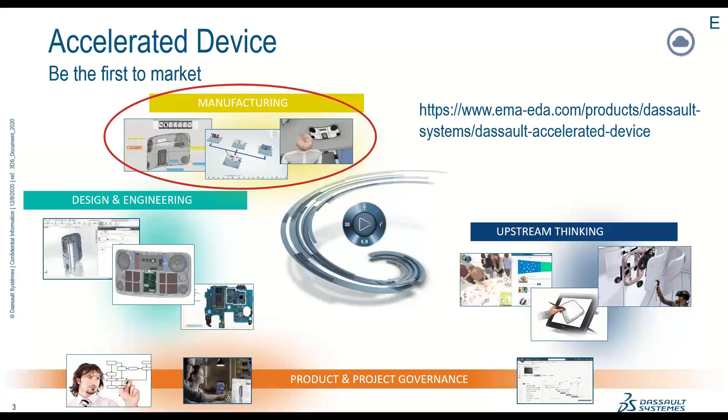Thanks, Ed. Thanks, everybody. So this is interesting, working with EMA on this, because for years EMA has really been one of the primary companies that I've gone to for years for ECAD solutions. And now we're going to talk about taking those solutions that we do for ECAD and going way beyond design and engineering. We're really going to move it into the manufacturing side of the business. So I'm very excited to be working with EMA on this.

So what we're talking about is manufacturing process engineering challenges. And when you think about it today, and they really substantiated themselves during COVID-19, is really demand planning, supply volatility. And then the other thing we're seeing is mass customizations in manufacturing. People want to have their solution of the size and shape and color that they want. And basically, it's a global world of production and distribution.

So it's no longer being done at a single site. You might have multiple sites. And what we're trying to address here is really some of the questions we have on the right side is, how do we handle the increasing number of product models and variants? How do you handle increasing product complexity? Validating, is the product manufacturable?

And we'll talk a little bit about using a virtual twin to actually set up and look to see how you put your product together, at the engineering perspective, and then how to ensure products start production despite an aggressive timing. That's the number one thing. Everybody wants their product to go to market as fast as you can, and it's really sometimes really hard. And how do you handle change management effectively once it's hit manufacturing, and how to achieve the manufacturing process and manufactured product right the first time?

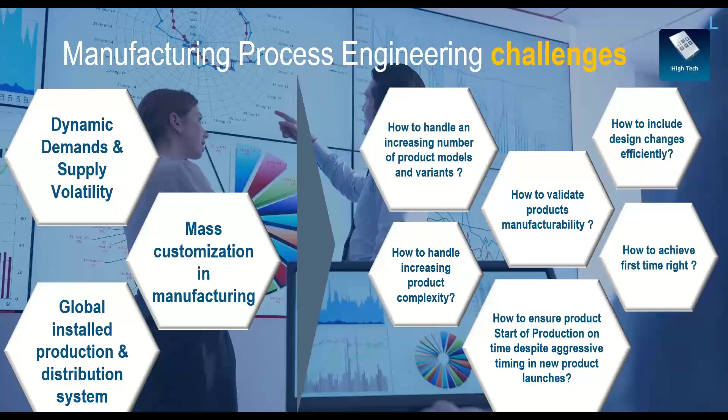Great synopsis of all the process engineering challenges, Lou. And what happens there is we have this great digital divide, this great chasm, and on one side you've got the engineering tools, and companies don't care about engineering tools whatsoever, other than an end to a means. What companies care about is products and getting products to market.

Designing those products, as I have and as Lou has for many years, we're design engineers. That's what we do. We use the authoring tools on the engineering side. We create schematics, and we validate that product that's going to work in the environment that's going to go in.

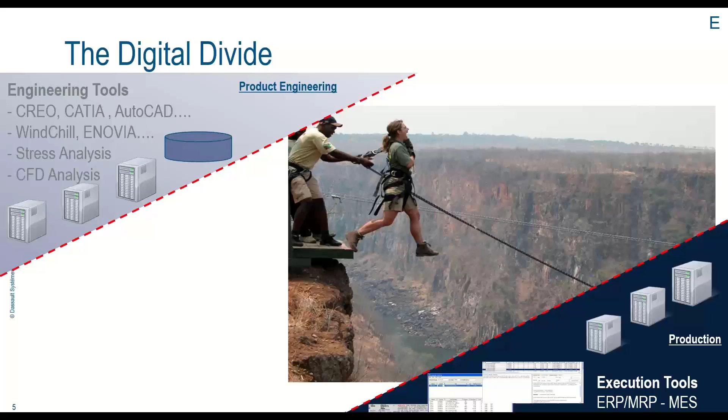But then when it comes to manufacturing, we basically throw it off the cliff, just like that person is taking the step into the chasm, or we're basically throwing it over the wall and saying, okay, production, manufacturing, you figure it out from there, and let us know if something doesn't work - we validated our stuff on this side. So the big thing that we're really looking at now is being able to plan, being able to visualize and validate that gap that's in between.

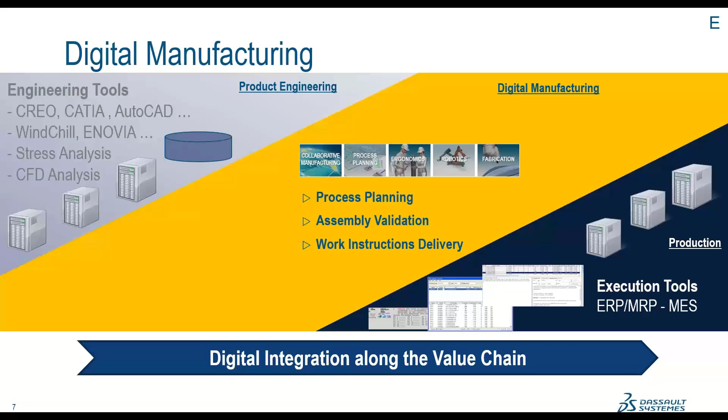In our case, we've had this digital manufacturing, this product engineering, and product production separated by this chasm that we talked about. Now we have this digital manufacturer, this way to do process planning, creating the digital twin, as Lou mentioned earlier, and being able to validate those assemblies and that process. Being able to create work instructions and really shorten the time it takes for people to learn to assemble the process, and make sure that process is well defined when it comes to the factory. So this is one of the things we talked about, crossing that chasm.

We're very familiar with the design process, and then we throw that design over into manufacturing. They create a definition. Well, what if you had the capability of visualizing that, doing a what-if of what if I move this workstation for this product a little bit closer to the next step in the process? What if I had better process planning? Everybody can have a plan, but plans always become obsolete very quickly.

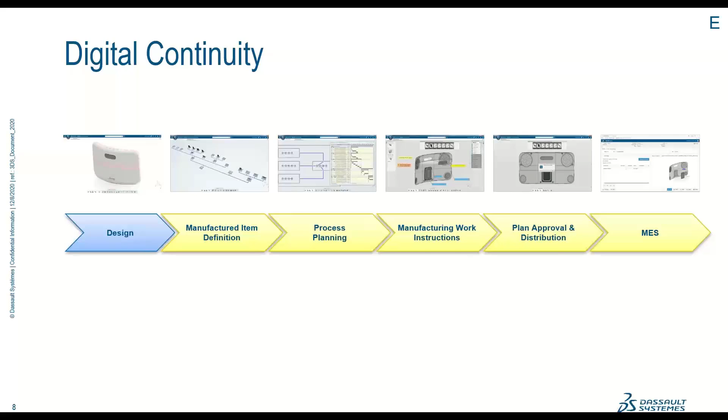So the process of planning and validating that process, and visualizing it in a way that can be optimized, is key. We mentioned work instructions before, getting people to condense the time it takes them to figure out how to effectively process and move things through the assembly line. And then when it comes to distribution, planning the approvals for agency approvals and distribution, there really needs to be a feedback loop there, and with our process and this digital continuity, there really is.

And we've got a short video to show how some of the mechanical or manufacturing bill of materials can be derived from the engineering bill of materials. Lou's going to go over that for us.

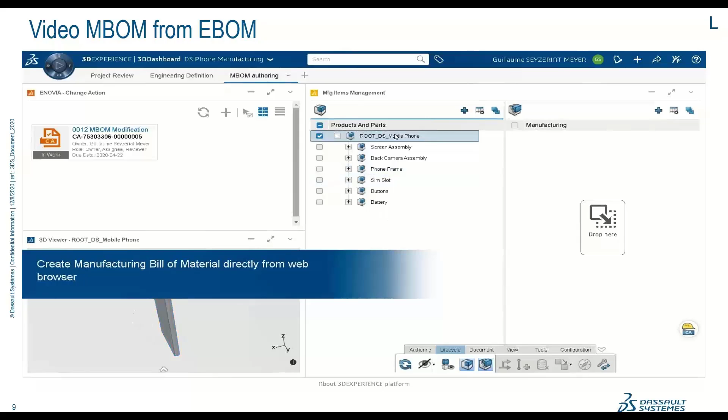Today this can be from mechanical or electrical, because we can connect to the ECAD and MCAD solutions. What's interesting is all the people who've been making manufacturing BOMs with their highlighters, crossing out bills of materials—sorry, we've taken away your job and made it digital. So what we can do today is take the bill of materials from the engineering side, and very simply drag and drop the different components into the manufacturing side to create a bill of materials. What's really unique is that we can also include make-or-buy decisions.

We can also include other types of structures to modify this. What you're seeing in the lower left, marked with a tag, is that as you take a different component, it actually shows it coming from the 3D world, from your MCAD, showing all the parts coming off. So the real crux of what's happening here is we've taken away the laborious work required to create a manufacturing bill of materials, and it's all validated. It allows you to take make-or-buy parts, parts you're receiving, and add other components like glue or fasteners, and combine both electronics and mechanical so you can really do an electronics box build.

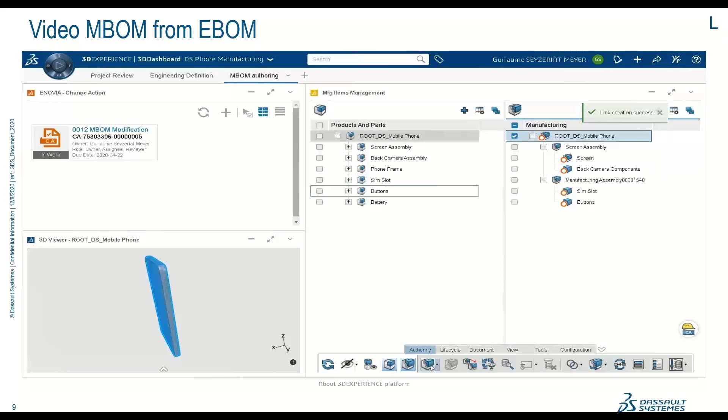So we can move on to the next slide, but the whole point of showing this is to modernize the divergence from the engineering BOM to the manufacturing bill of materials.

That's a great process to really understand and be able to visualize, Lou, and that's kind of what we're talking about here: this manufacturing process engineering. It's a way to visualize and get a great overview to model, plan, and optimize, using that digital twin to create those, do that process planning, create the work instructions, and optimize the assembly process.

It's really key. We talk about new product introduction, NPI, and NPI is either on time or, oftentimes, it's late. What do you do to condense the time during this process to make sure your product hits the market when it's supposed to? We visualize, validate, and optimize the product, whether it's assembly or manufacturing, and in a lot of cases the design process itself needs to be optimized as well, with things done concurrently instead of in serial mode.

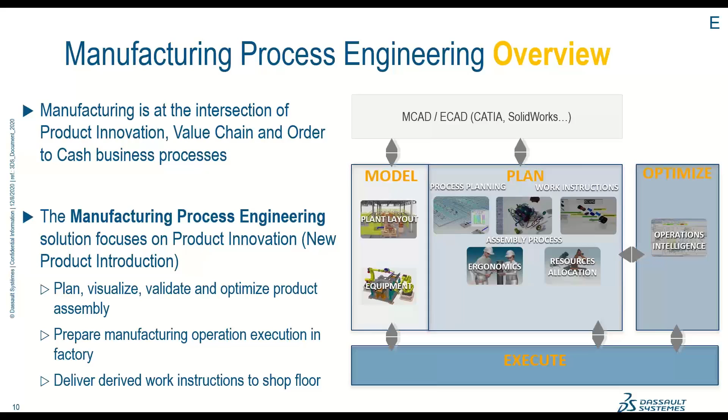And then we'll execute on those plans and move forward and make things better as we go every day. I know Lou and the Dassault folks have done this process with thousands of customers around the world, and the digital continuity is one thing that they're really experts at, right, Lou?

Oh, absolutely. What we've done is we've taken our rich history in automotive and aerospace and moved it now into the high-tech and digital manufacturing world. We have the ability, using the platform, to literally look at the engineering items. It's more about moving MBSE, model-based systems engineering, into manufacturing. So we're really looking at manufactured item definition, and you saw me doing that with the bill of materials. Then you do process engineering, where you figure out how the pieces go.

But once you have the pieces figured out, you want to validate your process steps. Are the process steps going to work? Does the factory you're working with have the right tools to do this? Once we have that, we can optimize it and tell you how to do the best line balancing, so we can optimize the manufacturing process.

And then, because we have the rich content coming from the engineering design, we can really simplify making process documentation. The days of taking Polaroids or pictures or snapshots of your engineering screens are gone, because we can do really interesting process documentation and change the way we do that.

And then we can look at the process distribution. This is really for some of the bigger companies that have electronics on one side and traditional box build on the other. We can look at multiple factories at the same time. We can integrate to the ERP system, and we specialize in manufacturing operations management and S&OP. That's really where we start getting into factory management.

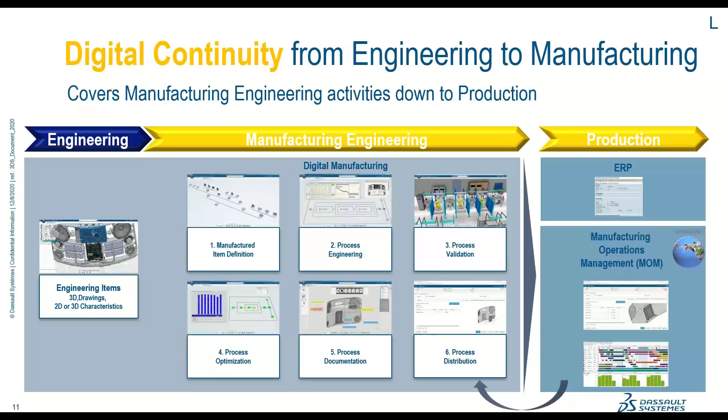That's a great point, Lou, and that goes all the way back to the engineering guys that thought they had got it right from the get-go. Oh, absolutely. You mentioned, what is the impact? How does it impact the business? How does it impact production, hitting the market at the right time? Improving the efficiency of the manufacturing planning.

And I always say planning, because there's a difference between having a plan and doing the planning, because the plan is always going to change, or something's going to happen. So being very efficient and having the proper manufacturing planning is absolutely key. We'll go into it a little more about shortening the learning curve for the production workers, but we want to have that continual feedback loop between process engineering, manufacturing, and even design engineering. So those are some of the impacts.

I think we have a short video here talking about the digital continuity and how that works in the process.

So when you're looking at the processes here, we're going to show you a bunch of different processes, and this is all using the Dassault platform. We're really recognizing and looking at the way products are built, and what you're seeing here is a product structure being delivered in a manufacturing perspective.

Each one of those is a work cell per se, and we're delivering the components in the 3D realm by representing them as multiple components that get put together. So that's how we create the bill of materials.

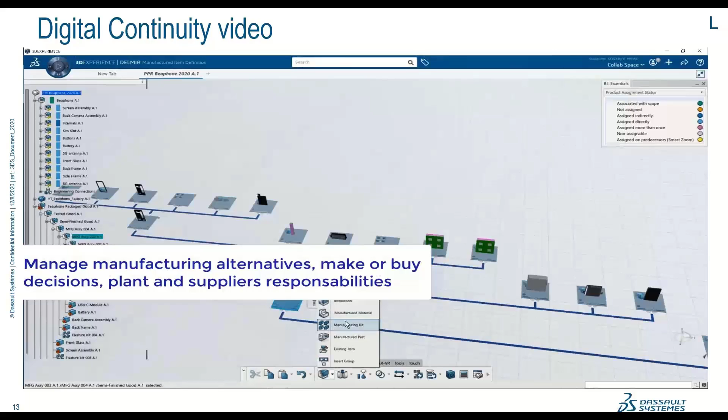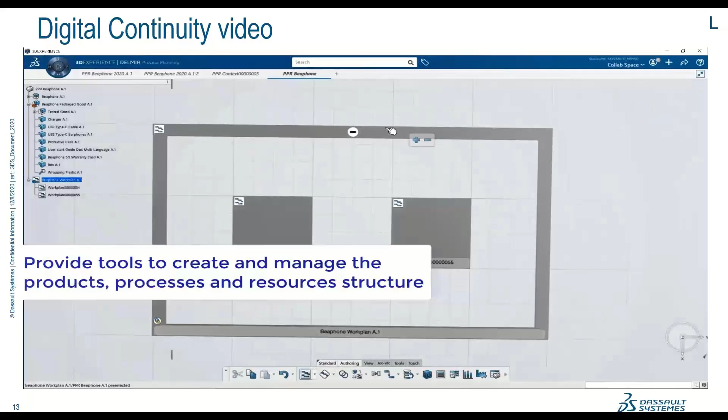What we do is we optimize the product for tooling and such, so we can actually do a lot of different interesting things. Basically what we're doing here is we're building the resource structure of what the factory would look like. The first one you looked at was what the breakdown of the parts were.

Here we're looking at the definition of it, and what we're doing is we're trying to optimize how the components go together with the resources you have within the factory, and to understand if you need to do some changes in engineering.

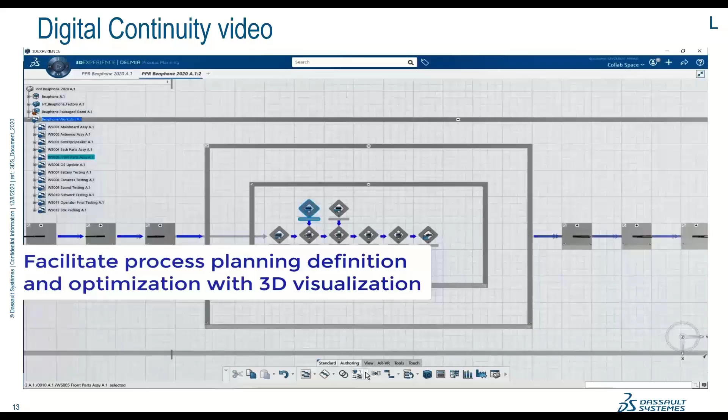The thing that's interesting about this is that you can do this anytime early in the engineering aspects of the product, so which is really, really unique.

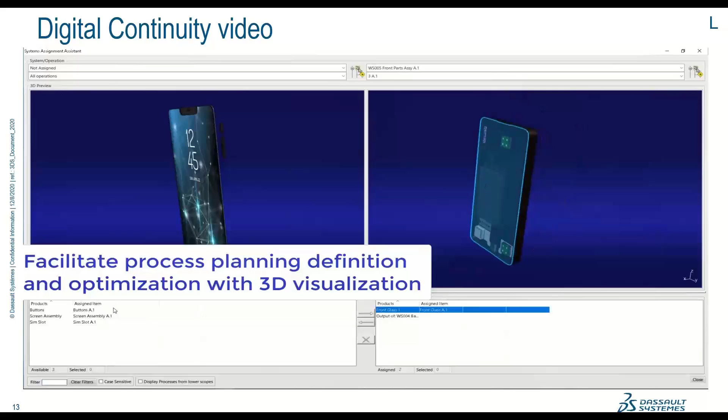So you can see that we can really facilitate process planning, and basically because we're using rich data, we can take the digital twin, we can literally show you all of the components broken down, and then we can take it to a different level altogether, where we can assign machines and factories and robots.

So if you have an NPI line or a production line, we can really super optimize everything, and we can really assess the resources you have.

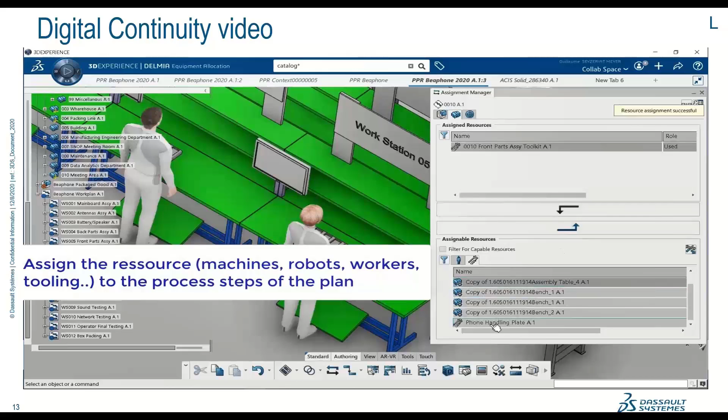How many workstations, how many tests you have, and we kind of create the digital twin of all that, and we understand how your product is going to run through, and then basically we can look at the resource planning, and then we can line balance and optimize the way you're placing.

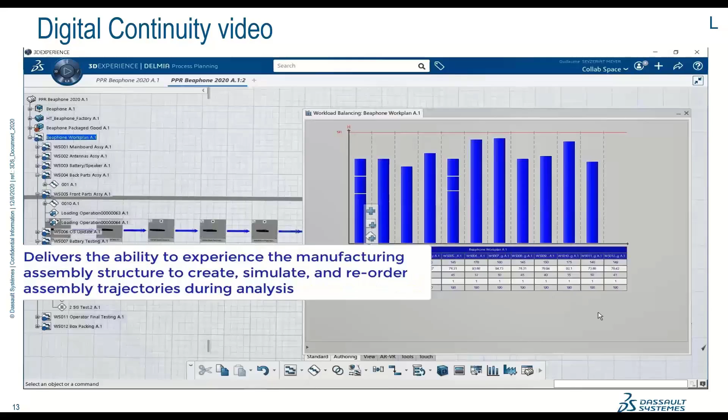Now here we're creating some work instructions, again, because we have the rich data coming from engineering. We can literally show the operator how to put the part in. You see that the part goes in, and then it has to be moved forward.

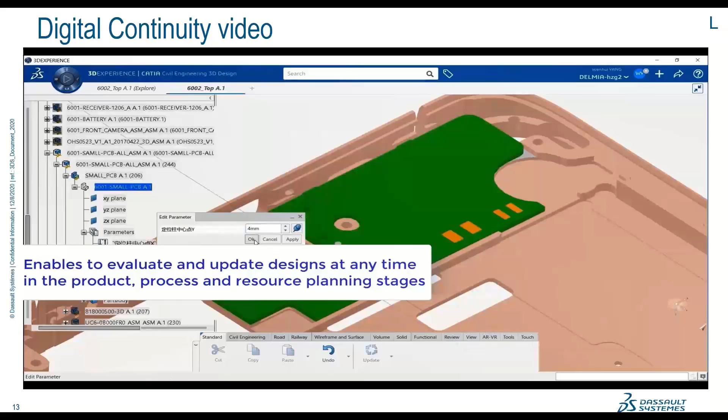Then we realize when we're doing this that there's an interference. So our tools are smart also during the manufacturing aspect. This is something that was missed by engineering, so they can go back and request to have that part changed, and now you see that the part will fit back in. So this is really some of the super value you get out of having the virtual twin of a part.

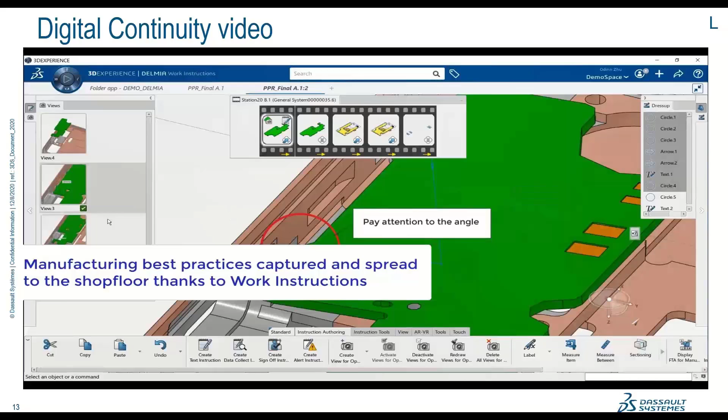So it's the measure and fit up, measure twice, cut once, basically using the virtual world. And there's no other way to find that unless you actually produced it or use these type of tools. And then right from here, it's very simple to create shop floor work instructions for that.

So basically, what we do here, to really close the digital continuity, is we can involve manufacturing very early in the design process, and they can walk through, or you can walk through with them and understand the design changes in the process while the product is in the maturing state.

It also allows us to create a better understanding of relationships between product resources and the manufacturing systems, and it really makes it easy to share relevant information to the downstream stakeholders, the manufacturing, the ERP and MRP people, and then improving the utilization of the resources by balancing the operations earlier in the process.

So it's really about combining in the engineering phase, if you want to streamline your manufacturing, is to really understand how you can optimize your design to really be designed for manufacturability.

And again, using the virtual twin has been super accepted, and a lot of people are finding things that they would never find until it's been actually in the shop floor. So we're really seeing a lot of customers moving that way, and the whole idea is to improve efficiency in the manufacturing plants.

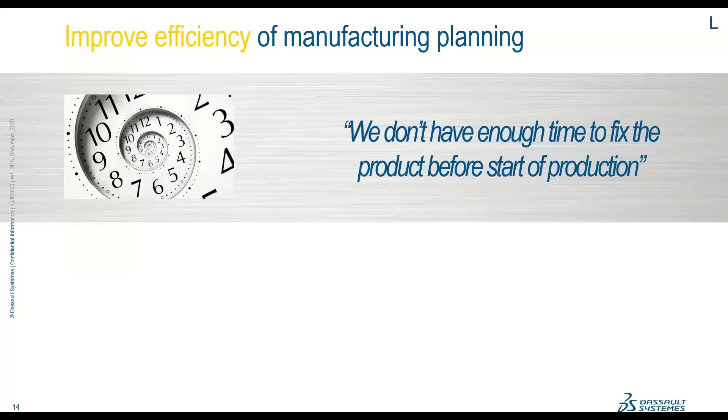One of the key things that our customers tell us, we don't have enough time to fix the product before the start of production, and we hear this all the time from our customers.

By using build-up visualization, you can validate your design and assembly prior to creating any physical builds. You simplify the material handling of different designs and design models. One thing we didn't show is that we can take a factory, and if you have multiple configurations—say red, blue, and green ones, or different memories and other stuff—we can put in those steps for what it takes to line balance and handle your variance and different configurations.

It allows us to do a huge amount of what-if scenarios and analysis in a virtual world. Think about taking your product design, running it through manufacturing with all the different variants, and figuring out the best way to optimize your machines. It's not just the SMT machines—it could be your line, because you have different color knobs, different bezels, different shapes. How do you best optimize the floor layout, the staffing needed to produce the product, and inventory holding levels?

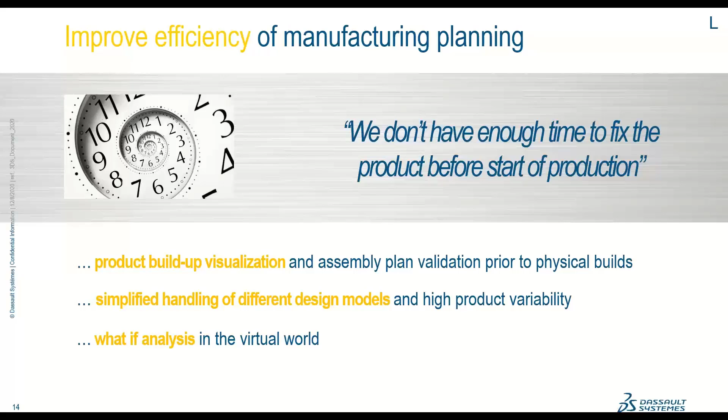Spot on, Lou. When we talk about improving efficiency through digital twins, the planning and being able to visualize that is key. Before that, it's: okay, we'll set up the line, run a prototype through and work out the hiccups there. That may take a day, it may take a week—it's really variable. There's no visualization, no digital twin, no validating that process until they're there.

That often results in delays and respins, going all the way back to engineering, which could effectively take weeks. But with this solution, we've got a plan. We visualize that, we do the what-ifs, and we fix any assembly errors or misunderstandings of manufacturing constraints—what they can do, what they can't do—up front. That allows us to deliver on time.

What would one week or two weeks be worth to you in your product if you hit market earlier—for instance around Christmas time, when especially now nobody's going to the store, so everybody's buying online? Now you've got another week or two weeks' lead with multiple variants of those products.

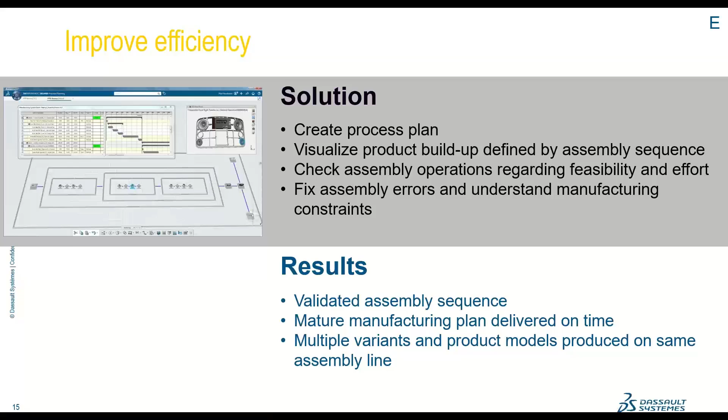That's another thing that resonated with folks on one of the first questions: being able to do multiple products, different variants, whether it's color, or one has GPS and one has pressure and other options you'd typically want for a product. So accelerating first-time-right in that new product introduction is absolutely key.

There are certain business goals we want to identify early on. The sooner we identify those issues, the more impact we can have on them. Overall efficiency is improved, we reduce costs, and if there's an engineering change, it's done earlier. The earlier it's done, the easier it is to deal with, and the lower the manufacturing impacts are.

One of my favorite slides that we didn't include here is the cost of errors on the manufacturing floor versus catching them on the virtual side. Every step in the process you move down, it's just another order of magnitude of cost.

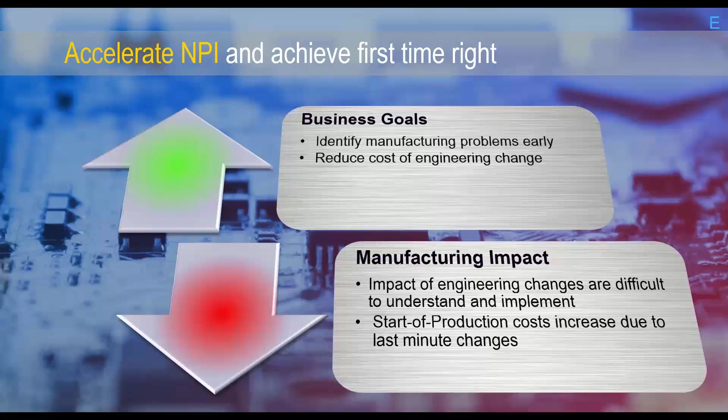We used to use that in production when we were doing mil-aero, Lou—it was: if I find this in engineering, it costs a dime; if I find it in manufacturing, it costs $10; if I find it in testing, it costs $100. And it's not a linear scale. With today's supply chain, sometimes you only get a handful of parts you need, and if you put them on a product that needs to be re-engineered, the cost could be the actual value of the product—meaning the product never goes to market, or goes to market too late.

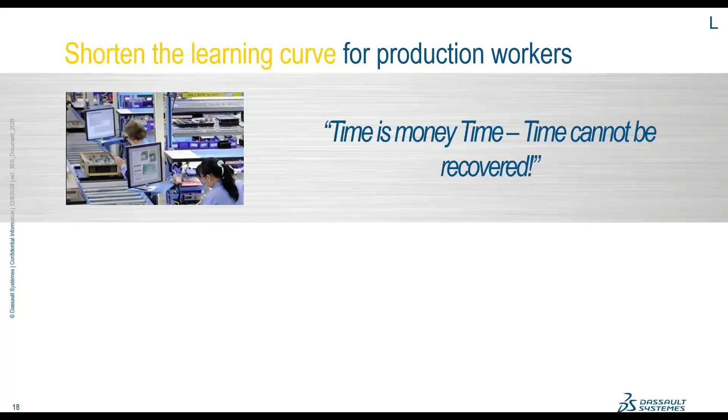Absolutely. And one thing we talked about was shortening the learning curve for production workers. People always say time is money—time isn't always money. Time can't be recovered. Time is time, and that's one of the things: processes can be condensed, but time can never be recovered.

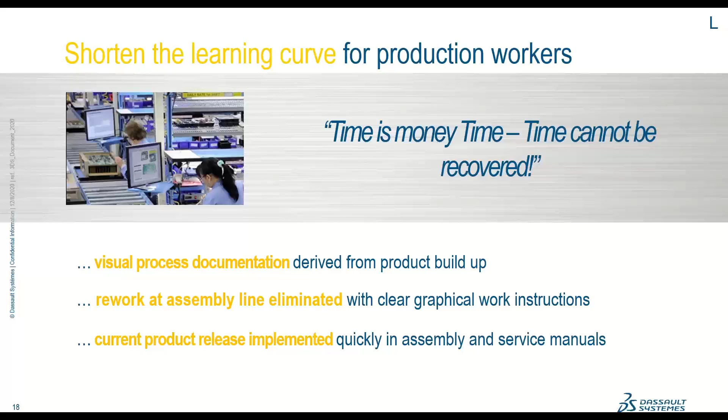That's one thing that building these visual processes and creating these what-ifs, being able to build these products up in a virtual environment, is absolutely key. And then giving people clear graphical work instructions. Some of the other instructions I've gotten from China and other places haven't been as good and clear.

Having those clearly concise instructions for assembly and work manuals are absolutely key. And like we said, we could have multiple views coming from the engineering side. One thing you were talking about, Lou, was having that continuum, having the data readily accessible, and feeding that information through the continuum to shorten the learning curves and reduce the time to get the product through manufacturing.

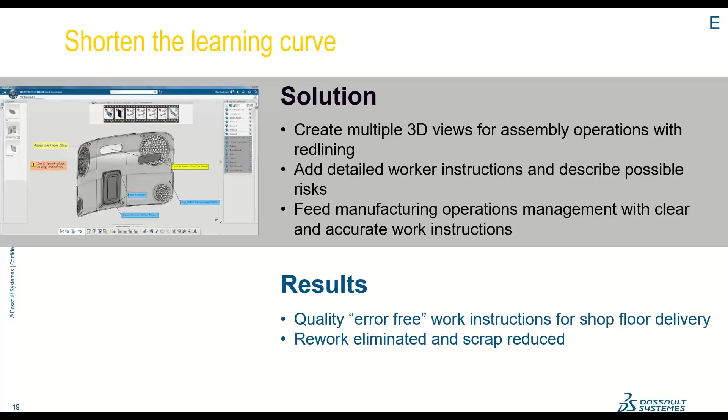What we see is most customers get almost 100% utilization or reuse of the engineering materials. So they don't have to create materials on the manufacturing side. It's a huge time savings just in the engineering instructions alone.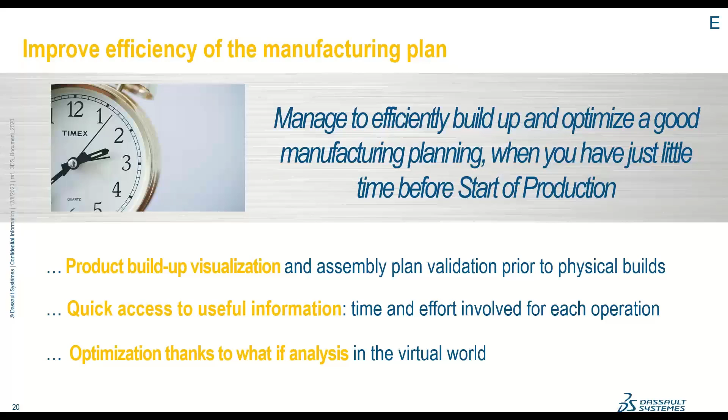So you take the plan and you do planning from that plan. It can be just a little bit of time before production starts, but it gives you the capability to visualize and validate the process ahead of time. Somebody going from building 30 products an hour to 40 products an hour makes a huge difference, and that optimization is what it takes to really be efficient in your product rollout.

So I'll just build up this slide real quick. First time right, we talked about that earlier, at least alluded to it. There's a lot of different terminology that goes with first time right: correct by construction, correct by design, minimizing those risks. Lou and I mentioned earlier how much those risks cost later in the process, really starting to increase exponentially. So really the goal is to, early and often, do your what-ifs to get the products to market faster. We have a short video to go over some of this with a smart factory.

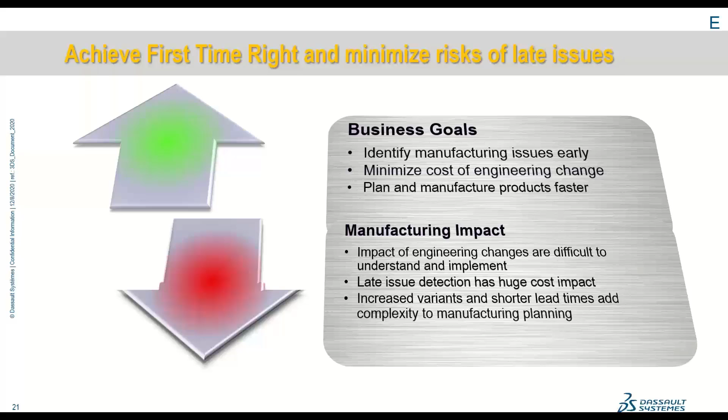Dassault has implemented this process and worked with thousands of customers to make this process 100% accurate. So what we're going to show here is really the plan, run, and optimize aspects of the factory solution. And as Ed has alluded to, planning is critical.

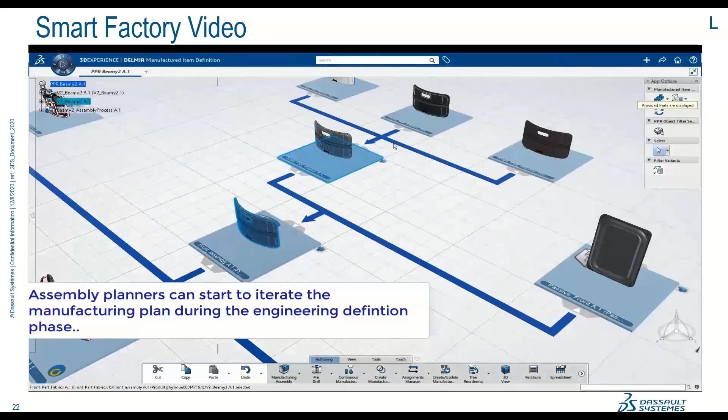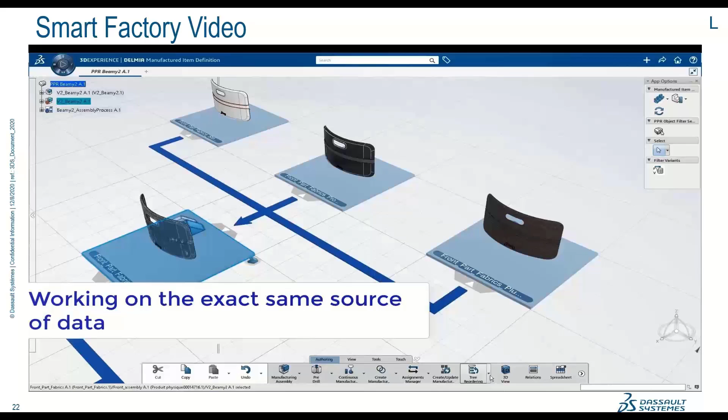Here you're seeing the product being decomposed into the workstations. It's really done by the bill of materials, and you're seeing the virtual parts come apart. This particular product has a lot of different variants, so you're working on the exact same data but with different variants, so we can graphically show the variants.

Here you're seeing a black, a white, a checkered, and a plaid front, and we can assign that to a configuration. As we run down the workflow and do the work instructions, they can dynamically change based on the work instructions, so you can have alternates and such. So what we're doing here is setting up the system to say that they're equal.

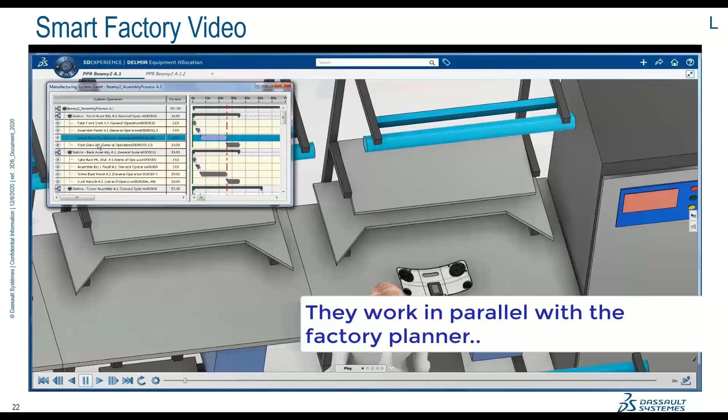Now this is typically how we show or simulate work planning, or the planning part of it. We take a look at it, we build the Gantt charts based upon how you've dissected the bill of materials and how you want to put things together. And once it's all put together, we can play through how each product step goes together.

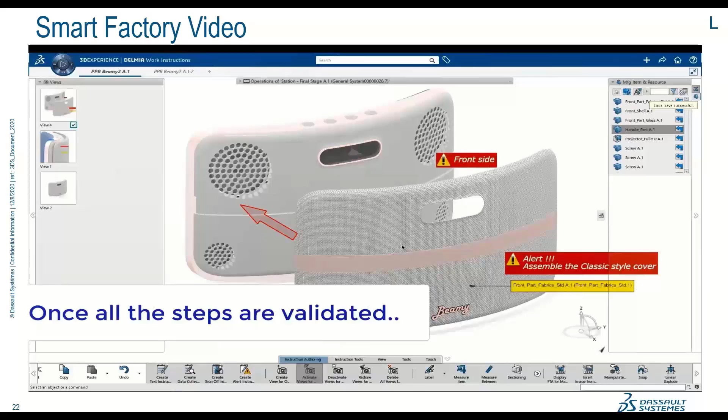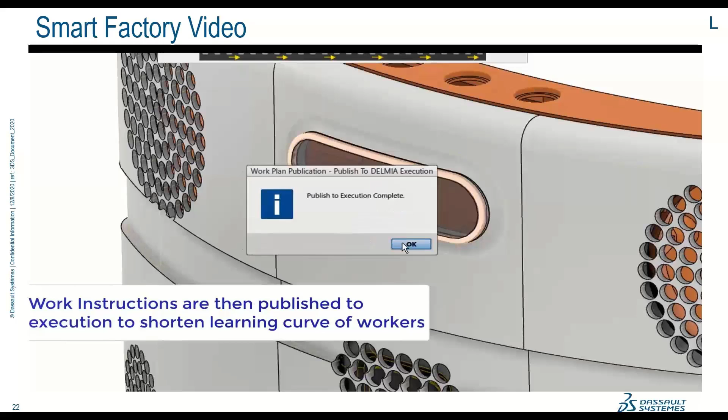You can see here, as we've added graphics to say you have to be careful of this, you need to look at this, don't do this. And you saw previously how we work on the other different pieces. Basically, what we really do is spend a lot of time publishing and simplifying the publishing of the documentation to the shop floor.

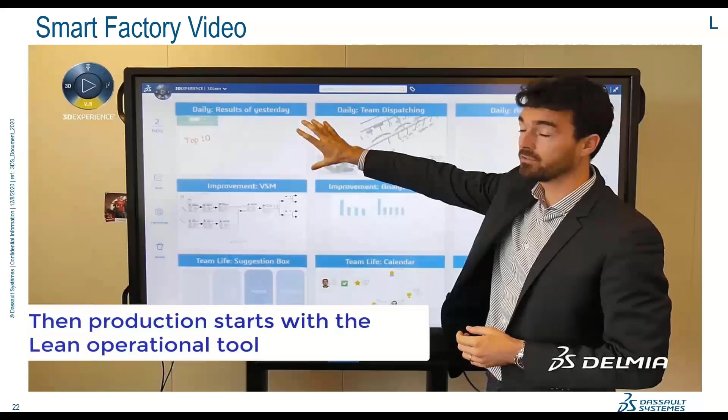It's really important. Now, that was the planning stages. Now we have some really cool tools. How many people out there have what we call stand-up meetings?

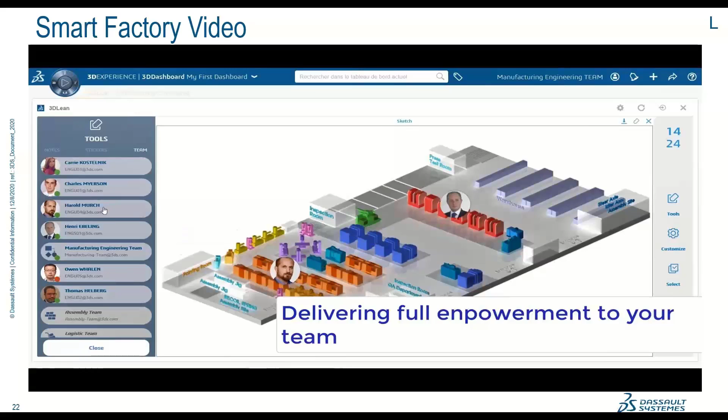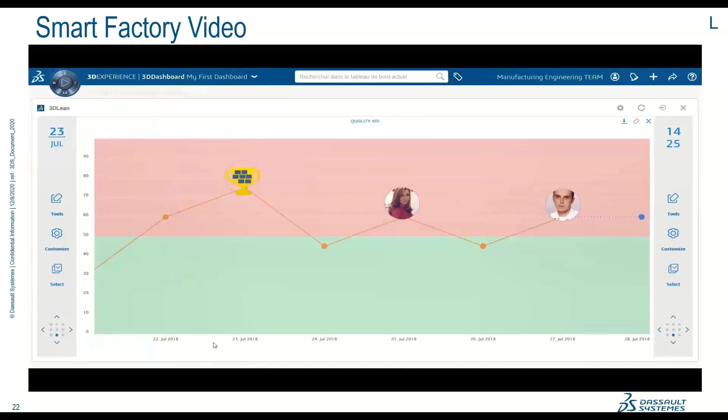Well, we have what we call our digital 3D lean tool, and it's really designed for doing stand-up meetings in the factory, or we actually use them in-house also for regular pieces. And we really create a digital continuity by using the stand-up technology, where you can show the different product runs, the different margins you're doing. You can also add sticky notes and stuff to it as we go along. Really, our goal here is to master the production.

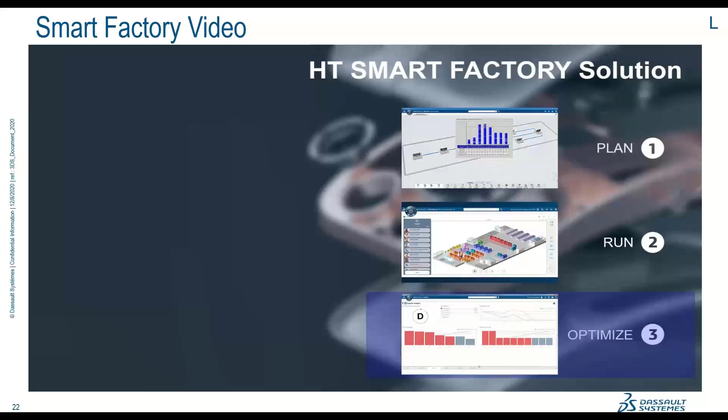So we use the same system to publish work instructions that we get from the engineering side. So what you've seen is that we've planned it, we've run a simulation, and now we're going to optimize it. And you say, well, if I'm offshore, where do I need to optimize it? But the interesting part is it depends on where you sit in the factory.

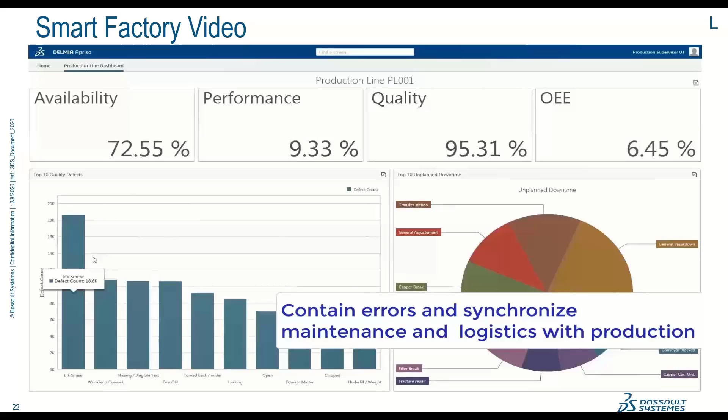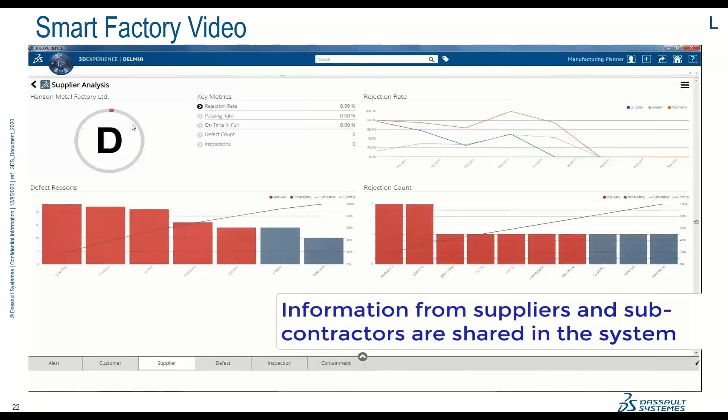What we do is we can actually get clear information on how things are running, and on top of that, we can connect to the equipment if necessary. In a larger company, we have what we call internet or IoT connectivity, and we can connect to the factory and really watch the production and everything in real time. We can also watch the information coming in from the subcontractors and contractors.

So our goal is to really reduce the variance and reduce inventory levels, and anybody in manufacturing will totally understand where we're coming from here. We've been doing this for years in automotive and aerospace and defense, and we've recently moved into the high-tech world with these solutions, but these are scalable.

So don't be afraid if you're a small company, because you may not need the S&OP stuff, but the virtual documentation and the ability of the other documentation is unmatched when you're handing stuff off to a subcontractor. And most likely a lot of your subcontractors may be running our solutions as well. At the same time, it really eliminates a lot of errors that you see in factories when you offshore, and it also helps with communications with the offshore, because you can actually do work instructions if you have a specialized way of putting something together.

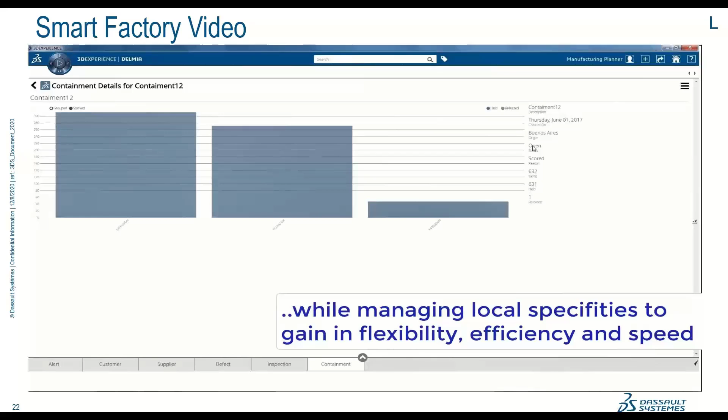Yeah, we're really nailing this, Lou, when it comes to optimization and the process. It really is important. Like I said a little bit earlier, what if you miss this Christmas online season? It's not going to be like it was before. The dynamics of the industry has really changed.

What we've done is we've really changed the game too, because we're using ECAD and MCAD data. So basically it's a game changer, because we look at the factory as a factory. In a box build factory, you could have an electronics factory, you can have battery factories. We really changed the game in this virtual engineering world.

And now we're in the process of changing the virtual manufacturing world, specifically in high-tech products. You'll notice that a lot of this is that high-tech products are pervasive. So these high-tech factories that we see actually do exist in the automotive companies. One of our biggest clients is a big electronics manufacturer that does a lot of the U.S.-based vehicles, and we also have other electronics manufacturers all over the world that do the same technology.

So this is tried and true technology. But I say again, it's very scalable, from a small company all the way up to the biggest companies in the world.

Yeah, and having that planning and being able to improve that efficiency, like you're saying, Lou, with the digital twin, getting that full detailed picture of the process and optimizing that as part of the process, running it through those what-ifs, and creating that product plan, and validating that prior to building stuff saves so much time and effort when it comes to actually having product that is for sale online and through different vendors around the world. And just having that visualization process is priceless, as it would say.

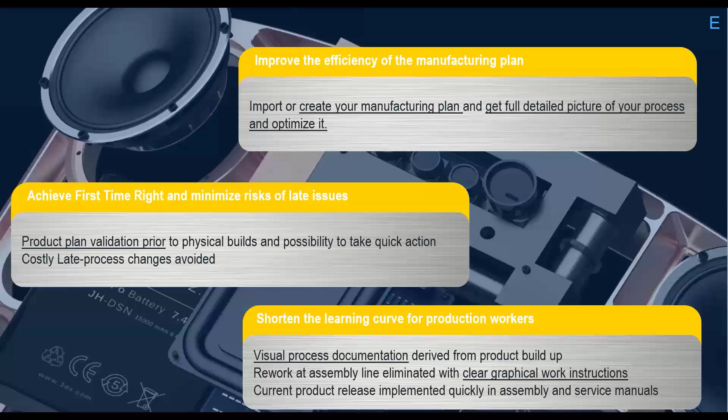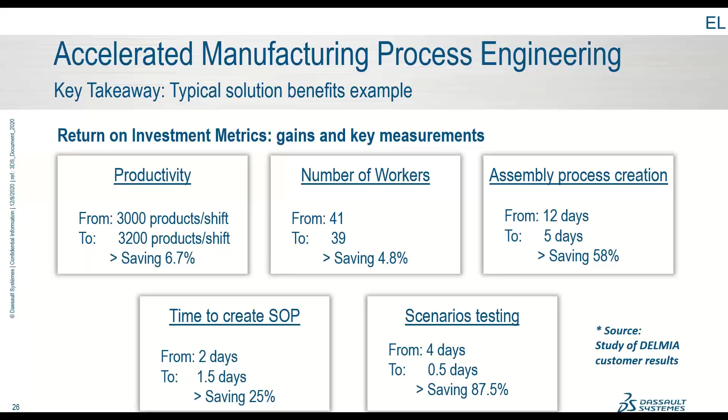Fantastic. Yeah, that really explains well the entire process, this whole planning, visualizing, validating that we've been talking about today. And I'd just like to thank everyone for attending. If there's any questions that you might have or you'd like to get in contact with us, we'd be more than happy to get you more information, to direct you to videos and other applications, notes that you might find useful.